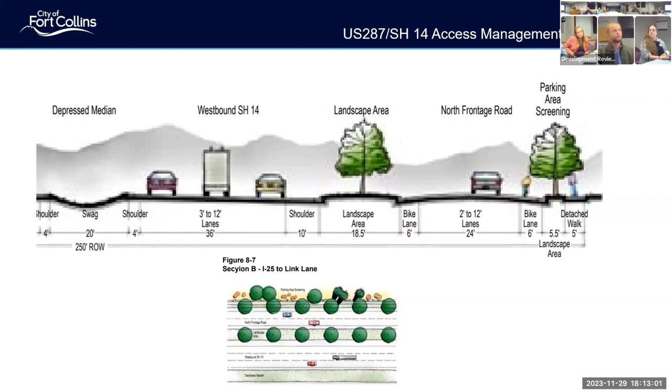So, but somewhat related. Next slide. So these were those original conceptual reviews. I'll let the applicant team sort of dive into the details of how this has evolved over the last several months. And then I think that should be it.

Oh, this is the most recent version of the site plan that we saw. But again, I'll let the applicant team cover that. Awesome, I'll bring up your slides.

Okay, take it away. Cool. So thanks, Scott, appreciate the intro. We have been working—our goal is to try to get aligned at some level with the city before we really started the process. It's always helpful rather than trying to come into the city with really opposing viewpoints. So it's been good to understand a lot more about what the city's trying to accomplish on the East Mulberry corridor study.

Our consultant team has worked pretty hard to try to find a balance between the goals on East Mulberry, which is really to try to create more densification, at least in view along the corridor, and a little bit more urban planning concepts along the corridor. So that's been a bit of a challenge in regards to trying to fit in some of our uses.

But you can kind of see our development team. My name is Dean Barber. I'm with TDC Development with Trey. Matt Delich is our traffic engineer. Rob and Emily are with Planscapes, and Troy Campbell, who's our civil engineer, maybe on the Zoom, I'm not quite sure or not, but he's our civil engineer on this.

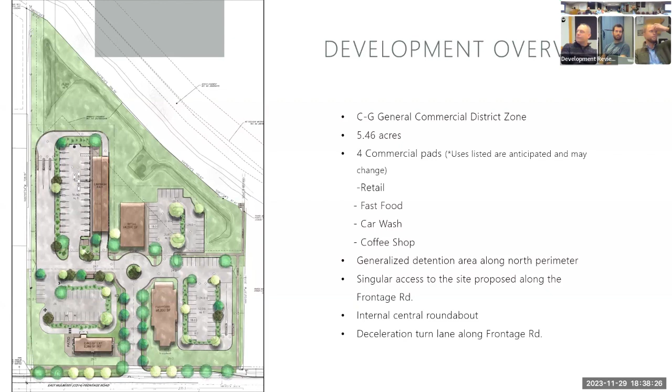The other thing I'll mention is Delozier, which is a little bit to the west of here. Do you know where Delozier's at? And if you can go back to... I'm not going to say this is going to be a— is this okay, or do you want the one with? Yeah, that's great.

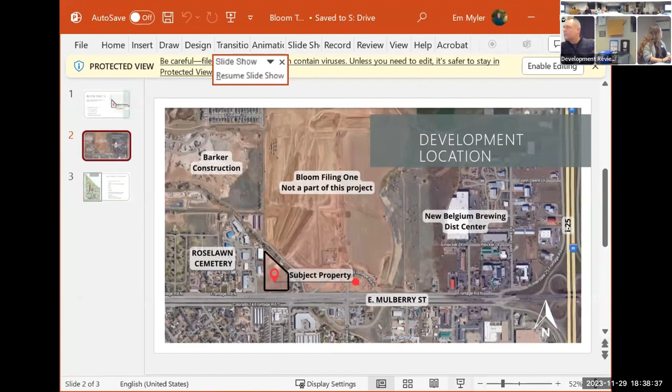Delozier, in Bloom, sort of rides this western edge of the site, and it's anticipated to come down and connect into the street. Now, don't ask me how or when, but this could be 10 years, 20 years down the road. When this redevelops, they've secured right of way through here.

They would just have to figure out how to make a street connection here, and it would provide some greater level of connectivity down to the frontage road from a different route. And then again, that's where that commercial core will be for Bloom. The thing the city's been advocating for, and what the PUD standards really talk about, is getting pedestrian connections, like pedestrian bridges across impediments like canals to other portions of the PUD. We're just not sure it can be done in this case.

And then again, that sidewalk as part of Bloom is going to be constructed up to this point. This development will build this sidewalk, but there's going to be this intervening parcel that doesn't have a sidewalk, so our engineering staff will likely have some comments with respect to providing overall connectivity to the larger development. So it's still kind of an ongoing conversation between staff and the developer at this point.

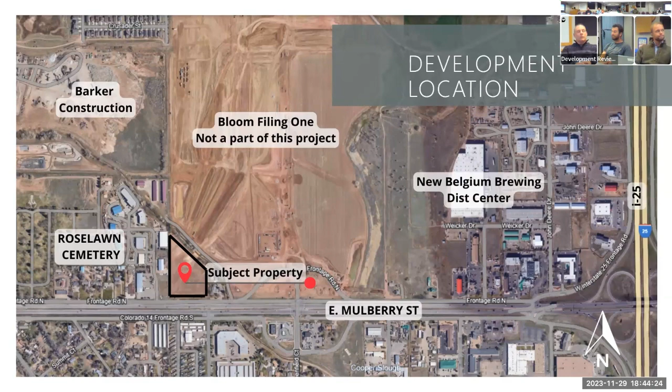I guess I just had more of a comment. It's kind of been mentioned before, but Mosaic, and I guess Bloom, is going to be pretty cut off from services and things like that, so I feel like this is a good opportunity to fill some of that. But don't forget, there's District 3, I think it's 25 acres of the other Bloom piece, with the commercial uses. So we're only looking at our piece, but ultimately they're planning for 5 times that. We'll have big districts.

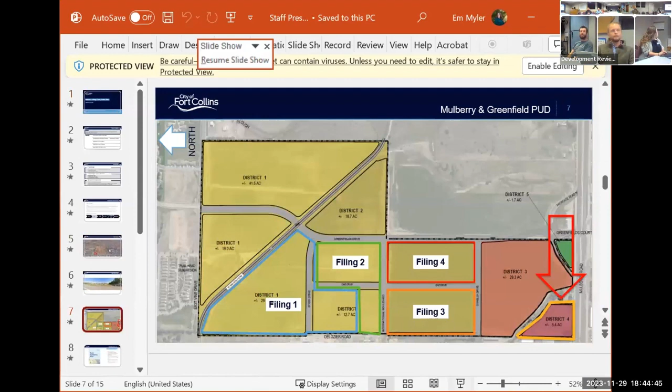So do you know, is that all a different color or different zone than yours? Is that all commercial, or what is it? They do have a big section there. I guess we're District 4, they're District 1. District 3. Because that's a different zone? Yeah, so District 3, again, this is going back to the PUD.

This is an overlay district, which supersedes some of the city standards with respect to building design, parking, stuff like that. But the underlying permitted use list, there's 3 other districts here. There's general commercial, which aligns with District 4. District 4 is general commercial. As you get further north towards filing 4, that's the neighborhood commercial tract, about 10 acres in size. Then there's an employment zone district a little further down towards filing 3.

So it's envisioned that District 3 will be a combination of neighborhood serving uses, typically childcare, banks, dental offices. If you think about North College Marketplace, those are some of the uses you might envision around a grocer. The other part of this is that, by the zone district itself, employment, they envision some sort of office type uses in there as well. So it could go a few different ways.